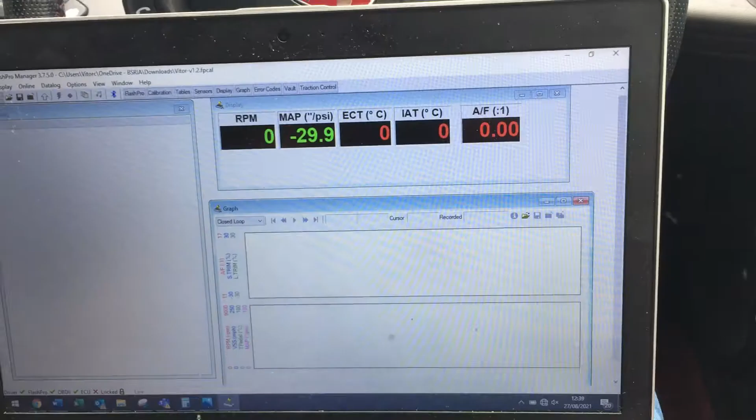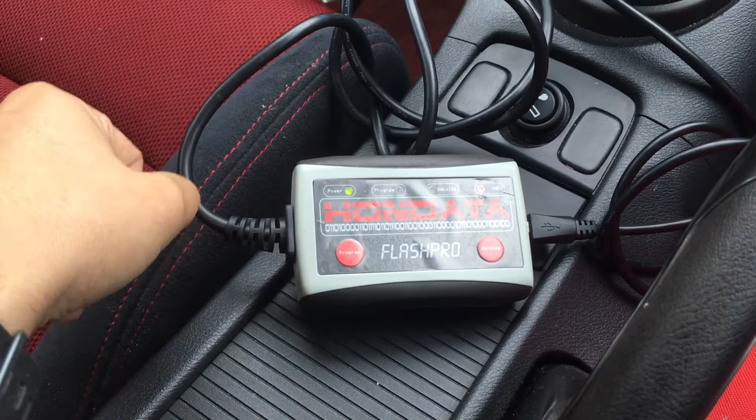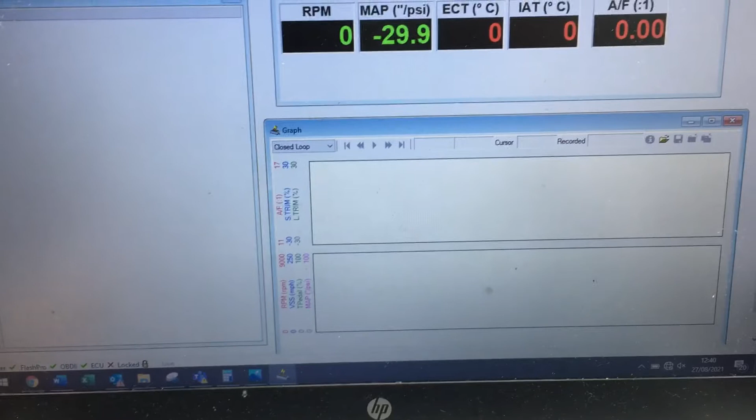Alright guys, I'm gonna try to demonstrate how to upload a map to the ECU. The first thing you want to do is basically connect the Hondata FlashPro to the OBD and the USB lead to your computer. You want to open the map file, and bear in mind this is one way of actually uploading a map to the ECU. I'm gonna show the other way to do it. So the next thing you want to do is to put the key to the second position, so before starting the car.

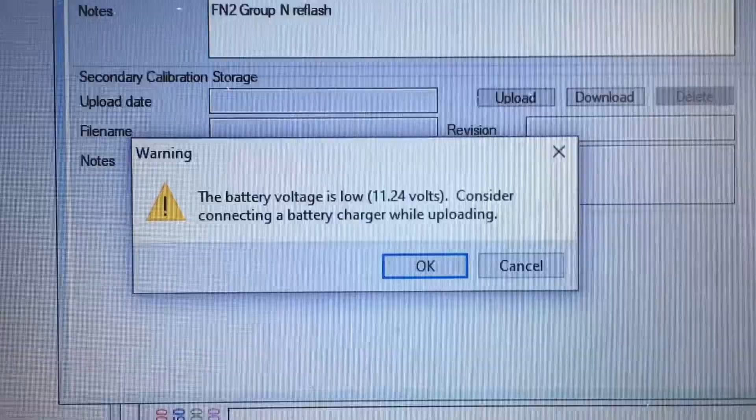Right, this is one of the things that may happen when you're trying to upload a file. If there's not enough voltage, the FlashPro will give you a warning saying they don't recommend you to upload the file. I think you need to have more than 12 volts for this to work. I'm aware that my battery is not great and it might need replacing. So that's one of the things you want to check before actually installing a map.

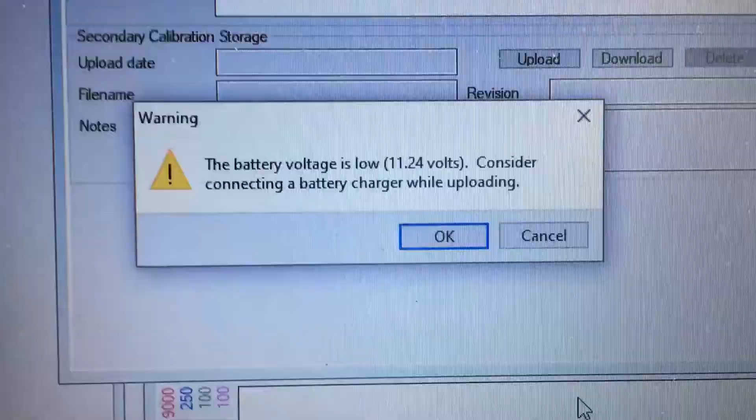So basically, if you want to flash the ECU, you go to the FlashPro. Just ignore the name of the file that is actually on the FlashPro, because you are uploading through the file that you just opened, and then just click upload. It will start uploading the file, and the other way you can see it is through the rev counter that also should start going up.

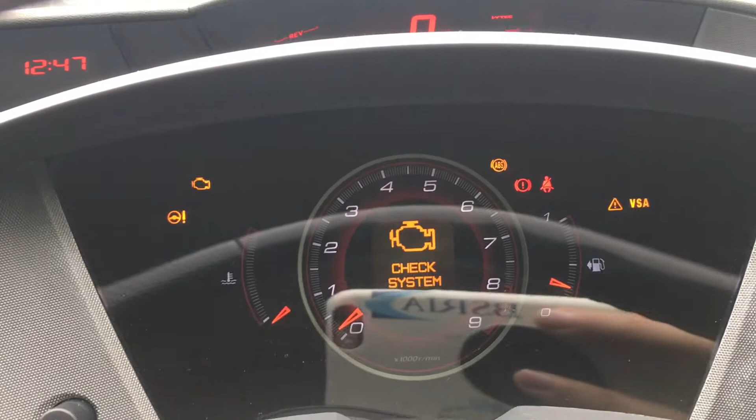There you go, you start getting some signs and everything. Don't worry, that's just normal. It's literally loading up the file, and as you can see, the rev counter is going up and is basically showing the percentage of the file that has been loaded. There we go.

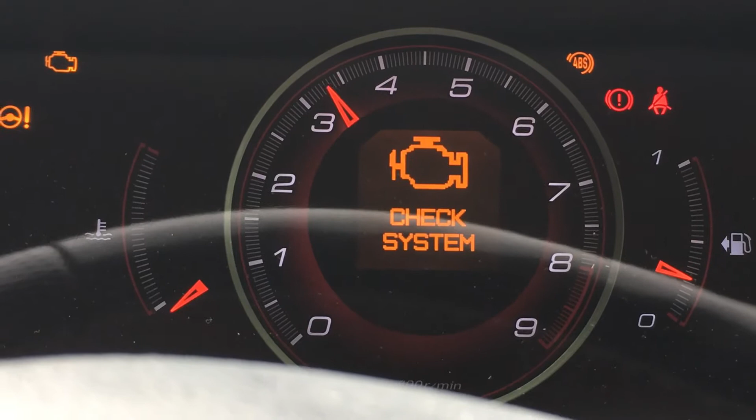And then I'll show you when we hit 4,000. Oh, I think it's 4,000. That is 50%, because we are 9,000 revs. So as you can see, we are now halfway through the process, and it's still loading the map. It's a bit of a slow process.

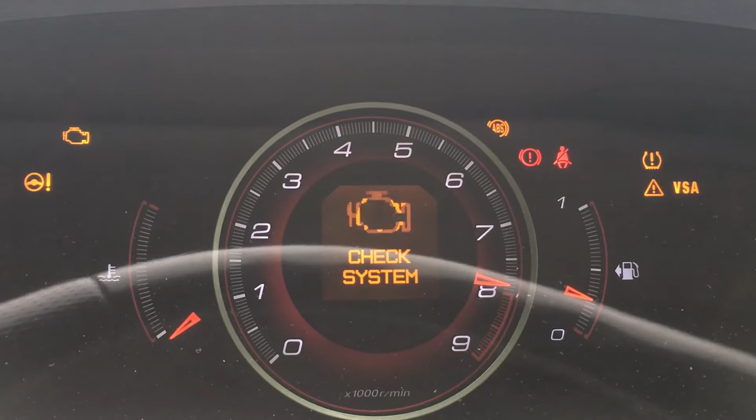I know that other programs like EcuTek and stuff like that are a bit faster, but it is what it is. I mean, the FlashPro is now what, 10 years old, something like that. But in my opinion, it still works fine. So we are almost 100% done. There we go. Gives you another sign. The FlashPro will tell you that the upload has succeeded.

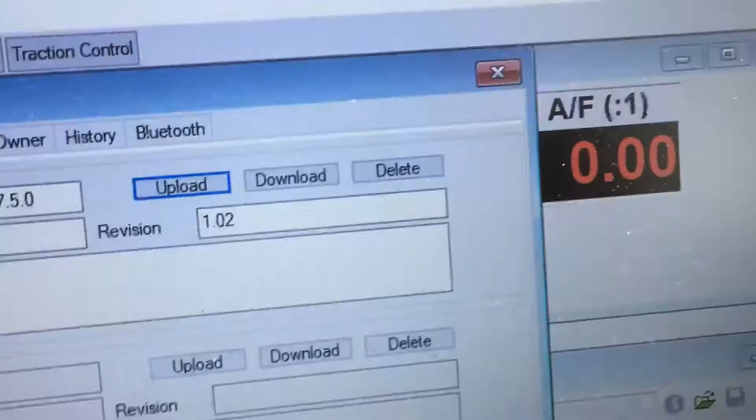Okay, so all you have to do now is power cycle the unit, and what I'm gonna do is start the data log to make sure that everything is fine. Again, to start a data log, you need to connect to the ECU first using F10, and then you can start recording using F9 or this button here.

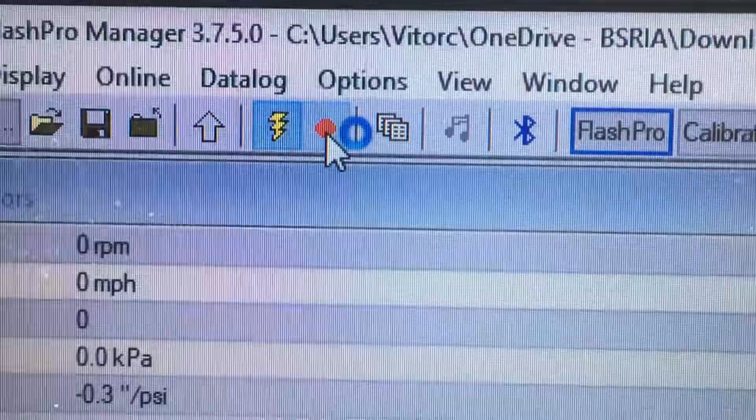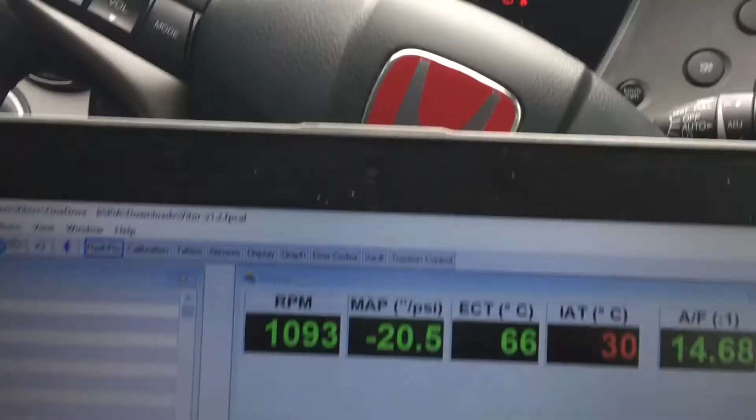So we are now recording, so I'm gonna hit the start button, and basically we are waiting for any errors. So as you can see, we are now logging, and ideally what we should do, or what I suggest to do, is to go for a drive.

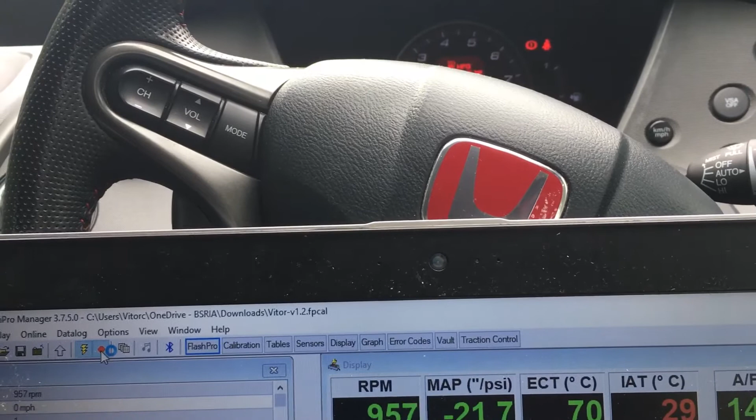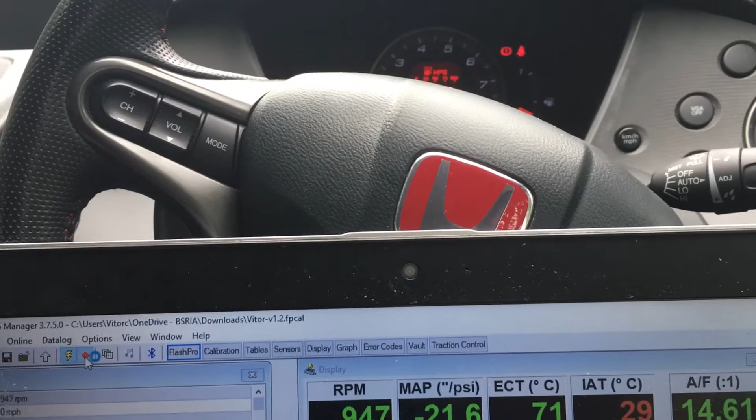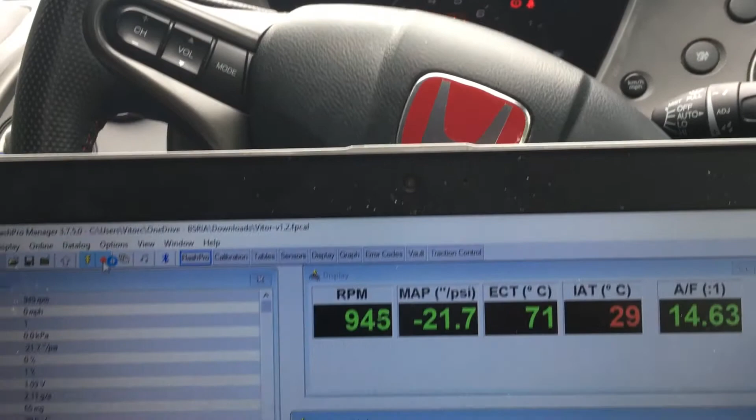Obviously let the car warm up a bit, don't engage the VTEC for the first 10-15 minutes, and then try to do a third gear pull, let's say at 20 miles per hour, and obviously do this within the speed limit. And all you need to do then is just check your logs and see if there's any part of the actual pull that doesn't seem correct.

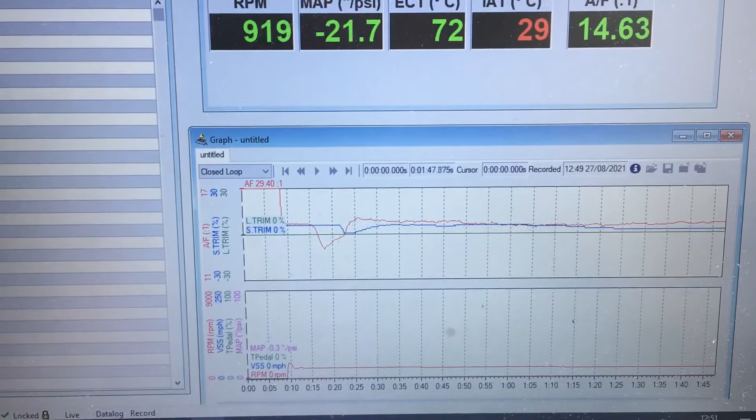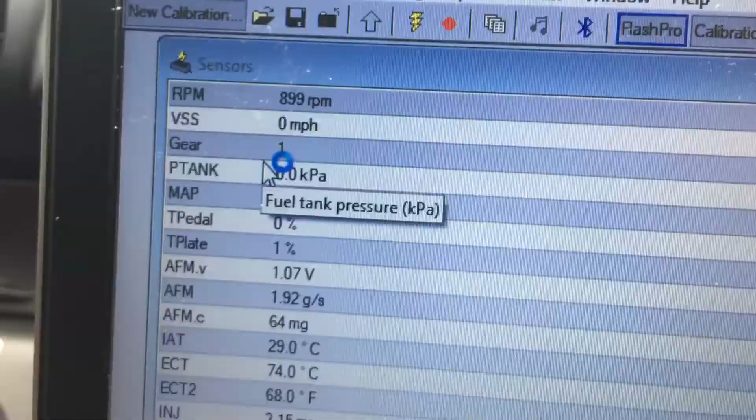So once you have enough data, or if you're happy with everything, all you need to do is to stop data logging and stop the connection, and just go to file, you go to data log, then you click save as, and then let's call it test YouTube, and that will save it as a data log.

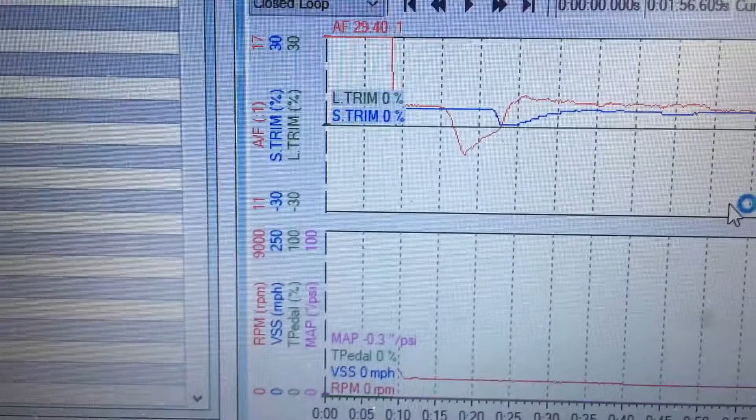So next time you open that file, it will be as a data log only. So yeah, don't forget after doing a data log to save the file, otherwise you'll lose all the data. And that's pretty much it. So we just need to go for a run and see if there's anything wrong with it.